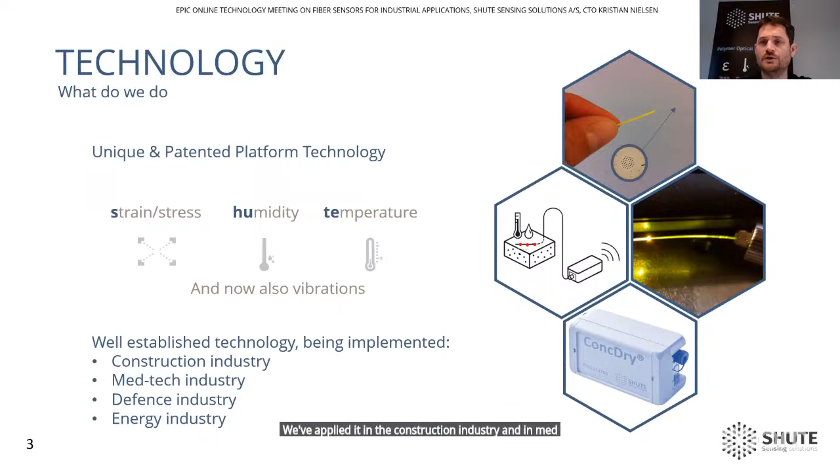And with that, we have been on a journey from taking our technology from the lab to now offering it to multiple industries. So let me talk a little bit about our technology first. So we do polymer optical fibers, and with them we can offer a sensor that is very sensitive to stress and has a very large strain range. It can measure humidity and it can measure temperature. And from those three parameters, we get our name, which is strain, humidity, and temperature. And being around for 10 years, we've also been able to demonstrate our technology in many industries. So we think of it as a fairly well-established technology. We've applied it in the construction industry, in the medtech industry, and in the energy industry. I'll get a little bit back to that in a minute.

Further on our technology, we make our fibers out of polymer, but we use the microstructured fabrication technique. And as you can see in the top left corner, there's a scanning electron image of the end facet of the fiber. We have 36 holes running through the length of the fiber in a lattice arrangement, and in the center there's a hole missing, and there where the hole is missing, that's the core of our fiber, and that's where we capture light. So using microstructure or photonic crystal technology like this enables us to make our fibers single mode. It also makes it possible to make fibers without any doping. So we can use pretty much any polymer. Our only requirement is that it's a thermoplastic, and it's fairly transparent.

We manufacture all of our fibers in-house. We use the drill and draw method, where we use a CNC machine to drill the holes in the pattern that we require, and then we have 2 draw towers to scale the fiber down from a 60 millimeter preform down to a hair thin fiber or any dimensions that we want. Well, this fabrication technique was developed at university, so there's nothing new there.

Our mission has been to take this technology from the lab and make it mature enough to go into industry. And two of the biggest barriers that we identified early on was the handling of the fibers and the cost of instruments. Now, the handling of fibers involves simple things such as putting a connector onto the fiber, putting protection and housing and adhesive methods or barriers for moisture or other handling mechanical aspects. And this, of course, is continuously going on.

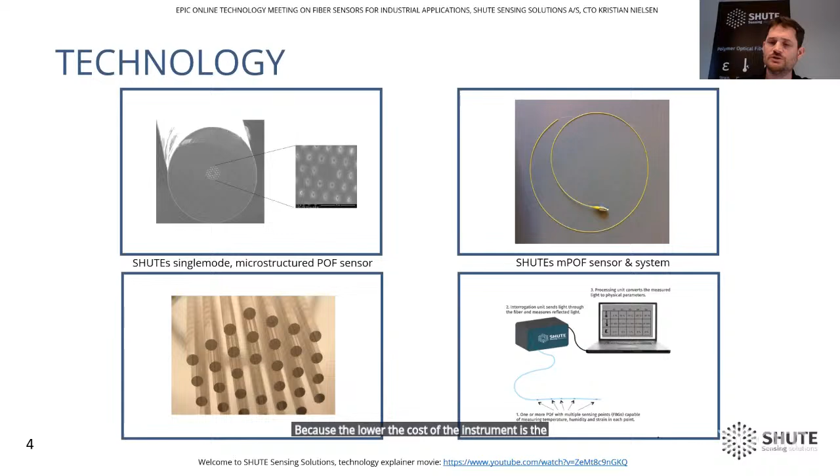Now, in order to interrogate these fiber Bragg gratings, you need a light source and a spectrometer. And part of our mission has been to lower the costs of these instruments. And our latest Contra system is now down to 2,000 euros. I think that this is a very interesting problem, and I know that there are other companies working on this as well. So I look forward to actually getting that cost down, because the lower the cost of the instrument is, the more markets we can address, the more applications we can address with our technology.

Now, the sensors themselves, being made of polymer with an FBG in them, really enable us to utilize the benefits of polymer optical fibers, in the sense that the polymer is much more soft than a glass fiber. Glass fibers are notoriously very stiff and hard to work with, and they break in a shattering method, whereas polymer fibers are much more flexible and can be more easily stretched and have a different failure mode.

The low Young's modulus of polymer fibers makes them ideal for picking up very small stress levels, and also makes them compatible with soft materials. So we have some applications where we embed our fibers into rubbers or into carbon fiber elements, plates. And in that sense, we offer new optical strain gauge capabilities to places where you maybe couldn't go with glass fibers because of their inherent strength.

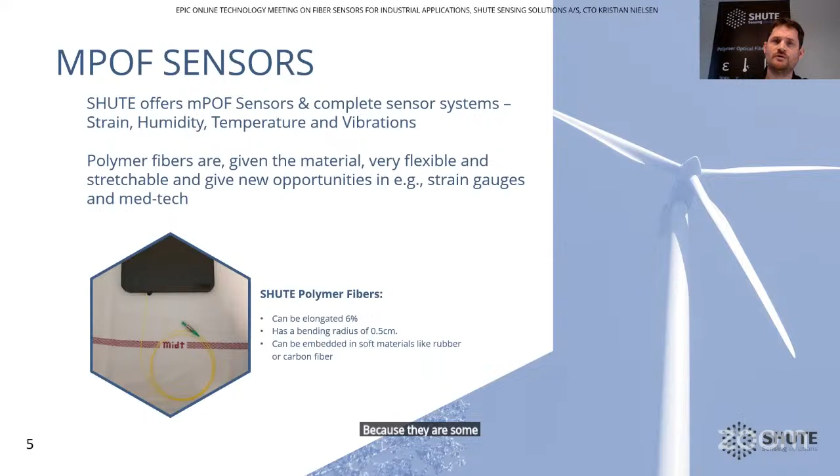On top of strain sensing, our fibers have a lot of traction as humidity sensors, which is also a fairly unique capability to polymer fibers, because some polymer fibers are inherently absorbent of humidity, and that makes them very good as humidity sensors. We have our own sensing system that we have developed called Contra, but we've also seen a pull for making optical sensors that are compatible with C-band equipment. And these kind of sensors we see as a complement to silica fibers, to glass fiber sensors, such that you could have a daisy chain of silica fibers, and at the end you could have one of our polymer fiber sensors as a humidity sensor.

The big advantage of using the polymer fibers as humidity sensors is that they are much more robust with regards to very high humidity levels. We can leave them in water for months, and afterwards they will still function after they dried off. There's no drift and there's no lock-in problems, as you might see with the electronic humidity sensors. And they are fairly compatible with many harsh environments. And being made of polymer, the sensors themselves do not corrode and they do not conduct electricity.

We have a few applications running with these kind of humidity sensors, and we have envisioned them being used in structural health monitoring, but also for critical infrastructure on pipelines or in tunnels, where you want to make sure that there's no ingress of moisture. They can, of course, be customized to different kinds of housings and different kinds of membranes that we can put onto them.

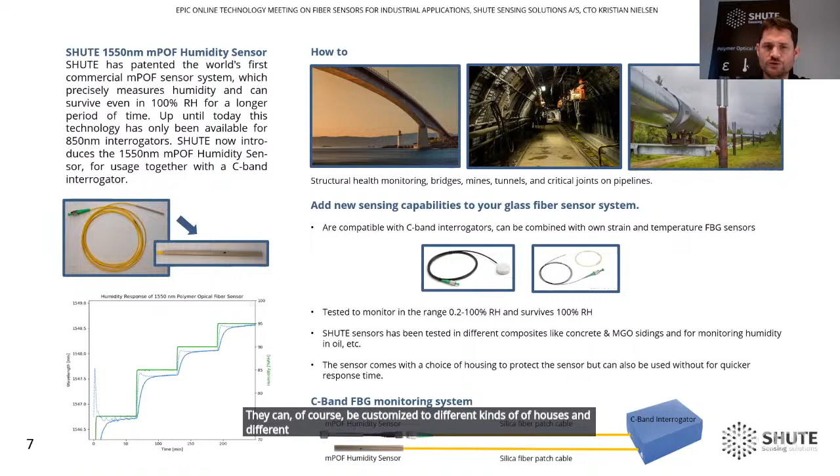The last thing that I would like to mention is that we are also offering chirped fiber Bragg gratings. These chirped fiber Bragg gratings are a fairly novel technology from our side, where we can make up to 100 millimeter long chirped FBGs. And these offer unique properties when it comes to detecting fast events, such as detonation fronts or shock waves in materials.

And again, we utilize the unique properties of polymers, being that they have a much lower mechanical mismatch as compared to glass fibers. This technology has already been demonstrated by the nuclear research facility in France, CEA, where they've done shock wave detection using our fibers, where we're basically using the polymer optical fiber and the destruction of the fiber for timing the arrival of the detonation waves.

And this kind of technology has a lot of promise, as well as maybe in other kinds of structural health monitoring, as in small solid rocket motors and stuff like that. I think with that, I will finish my small presentation.

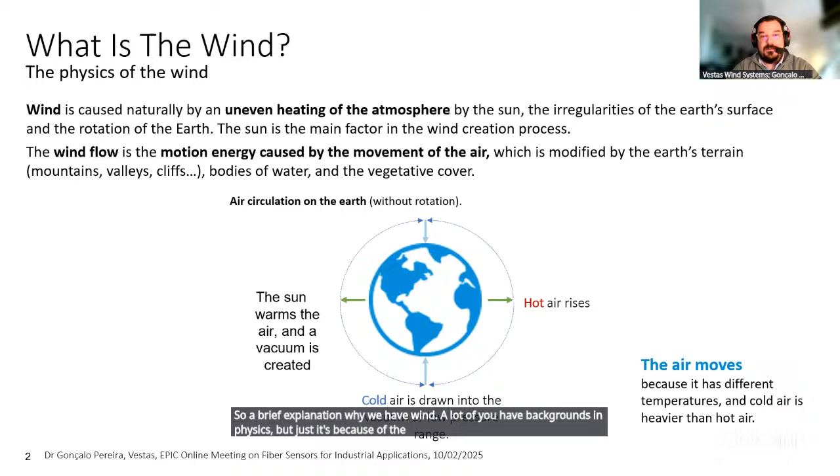A lot of you have backgrounds in physics, but it's because of the differences in temperatures, right? It's uneven heating of the surface, which generates wind. And then through the use of, in this case, 3 blades, we can convert some of that wind energy into torque, mechanical torque in this case, and then electrical torque to provide electricity to anyone that needs it.

There's something called the boundary layer. So you expect higher wind speeds at the top versus low wind speeds at the bottom. This is important not for this slide specifically, but a bit later when I show you the data that we pull out of these sensors. In general, we capture the wind using the blades, which we then convert into mechanical torque. We go through a gearbox, which increases the rotational speed, and it goes into a converter and transformer. From that, we produce electricity.

Regarding fiber optic applications, we have one related with sensing, which I'll talk about in detail today, but we have two more. So we have the FORJ. It's the fiber optic rotating joint, which connects the nacelle, so the static part, with the rotating part, the hub in this case. We have spinning blades, right? And we have communications, we have control, we have a lot of information that goes back and forth between the hub and the nacelle.

It goes through the center of the gearbox, right? So it goes through the whole converter assembly. So imagine like a drivetrain of a car. We have to fit a fiber optic through exactly the center of that. So it goes through the other hole to the hub to get that communication and that information going between the two components.

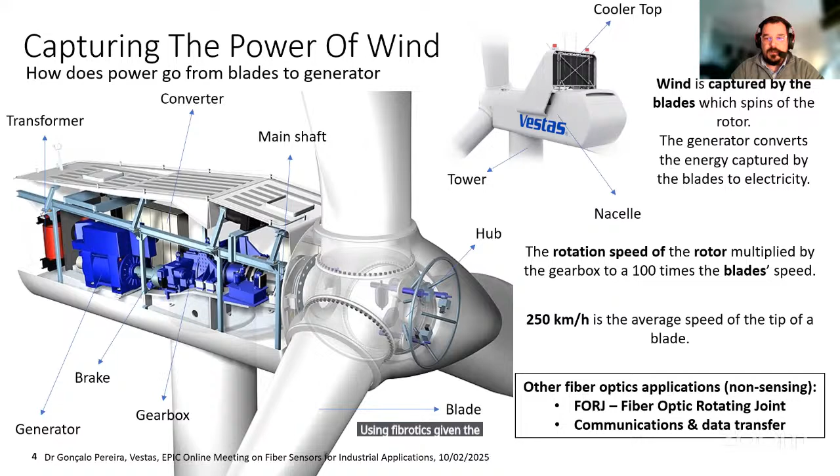Given the amount of data and speed that we request, it's basically the only option to go. So as an industry, if you're not familiar with it, it seems like there isn't a lot of technology going. It's a fairly big industrial machine, but it's no longer an option just to point the turbine at the wind and expect that it produces the best technology, right?

So I've put here a simple feedback loop to understand that sensing is a great part of why we can have modern turbines. We can control the turbine actively, not passively like in the past where we had stall control turbines where the blade itself would stall to prevent it from overspinning. Now we control the turbines using the pitch of each blade. We forecast and monitor ambient conditions. So if we can sense something, we can use predictive control to actually control ahead of time.

We can monitor energy production. And the most interesting part that people never think about is we can design innovative products and new control features. For example, one of our best known features is called rotor lift control. We basically take the example of a helicopter and flip it sideways. A helicopter would be something like this, and then we put it in a vertical position. That enables us to use the lift that we get from the blades to remove some of the natural weight, the gravity component of the nacelle, out of the tower.

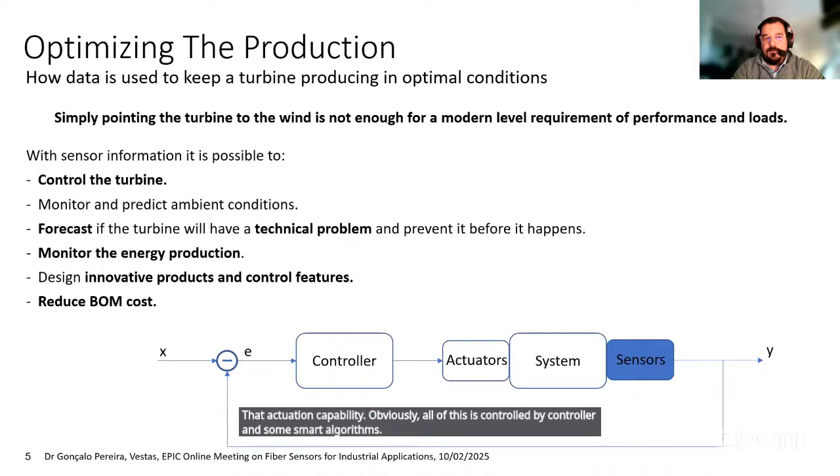So every time the turbine is in operation, we generate a lift, and that lift means that we have a lower load on the tower, which means thinner towers, less material, lower cost. And we do all of this with the aid of sensors and pitching. So we can reduce the bill of materials cost in many ways, in the blades, in the towers, in many components, because we have that sensing capability and that actuation capability. Obviously, all of this is controlled by a controller and some smart algorithms. So there's benefits not only for sensing, but also in other aspects of this.

I'll focus today on blade load sensing. It's the only one that currently uses fiber optics. And one question might be why, right? It's located on the blades. So the risk of lightning conduction is a major issue, and the main reason why we use fiber optics on the blades. We cannot have anything conductive that would basically fry the whole system of the turbine.

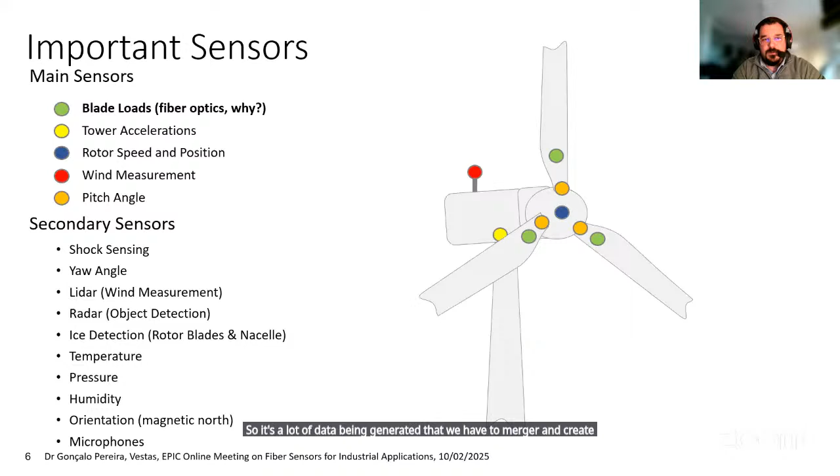So focusing a bit more on blade loads. Why do we need to measure them, right? We want to avoid as much as we can that a blade breaks or a tower collapses or we have some form of catastrophic failure. These are machines that are designed to last 20 to 30 years, so it's very expensive to get a crane there to get them replaced, right? It's not a sacrificial component. They need to last 20 years.

Furthermore, it's cutting edge in the sense that we're producing structures that are very long, very thin, very light because they're spinning, made of fiberglass or composite materials in this case. So it's really important for us to measure the health, how many cycles they do, and the overall performance of the turbine. And if we observe any degradation from what we expect, then we need to stop it and have it inspected or perform some form of repair if needed.

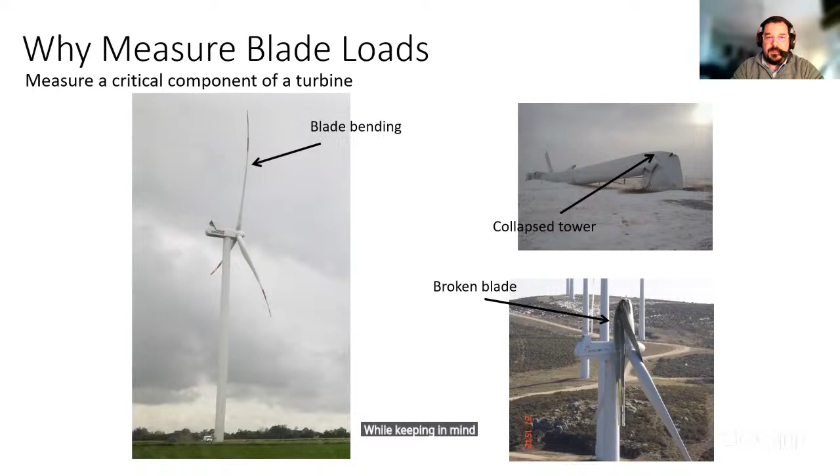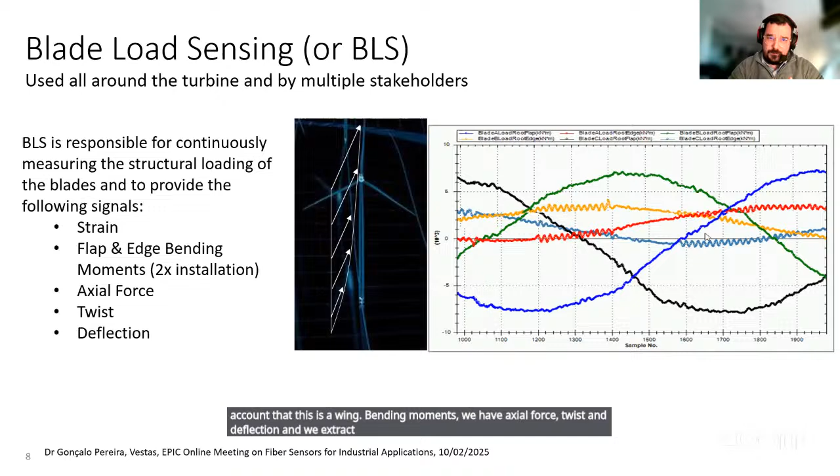And we usually are able to measure strain, flap, and edge, so taking into account that this is a wing, bending moments, we have axial force, twist, and deflection. And we extract all of this information from 2 sensors. They're exactly the same in design, but they're positioned in different places inside of the blade.

So the sensor is very simple. We have a diode that shines onto receivers, and depending on the bending moment locally at the sensor, you can see here on the bottom left that it's glued to the blade, we have more light hitting one of the receivers or the other, right? And we can calibrate this.

It's a very simple sensor that's covered by an armature to protect it from debris; there are a lot of things that might happen. Let's imagine a service technician forgets a tool. Then we have a screwdriver flying around the turbine and the sensor is protected. It was produced internally by Vestas, which was then sold to KK Wind Solutions. And we developed this system many, many years ago. And it's a very simple system.

That's why we like it, because in our industry it has to be cheap. It has to be easy to replace if there's an issue. And on the software side of things, it has to be transparent for us, right? So we need to be able to understand if there's an issue with the signal, with the information that it's providing. We don't typically accept any black boxes.

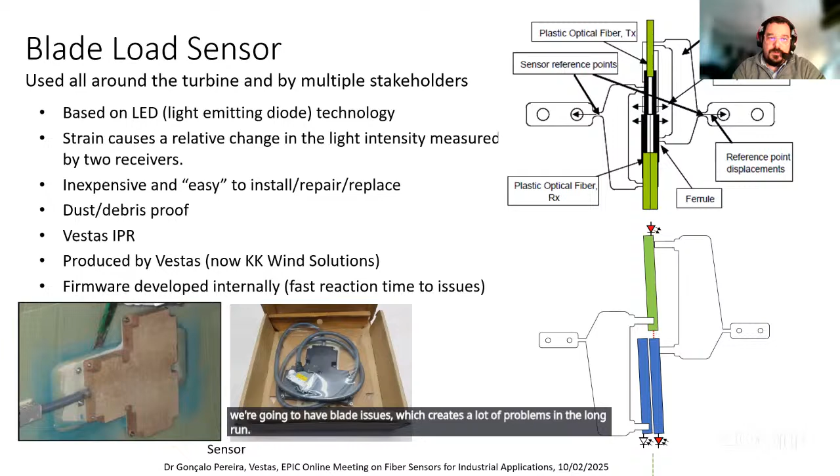So we need to be reacting really fast if there's a blade issue, because this generates a stop time on the turbine, and that generates millions. And if we're not able to detect this, then as shown by our competition in this sector, we're going to have blade issues, which creates a lot of problems in the long run, in terms of reputation and sales and all of the above.

So this is our largest turbine. I use the Portuguese stadium because we're Portuguese and where we've designed this, so you get the magnitude of this. It's the size of the stadium with the benches. It's not a football field, right? It's the football field plus all the stands there. So it's the size of a football stadium when it spins.

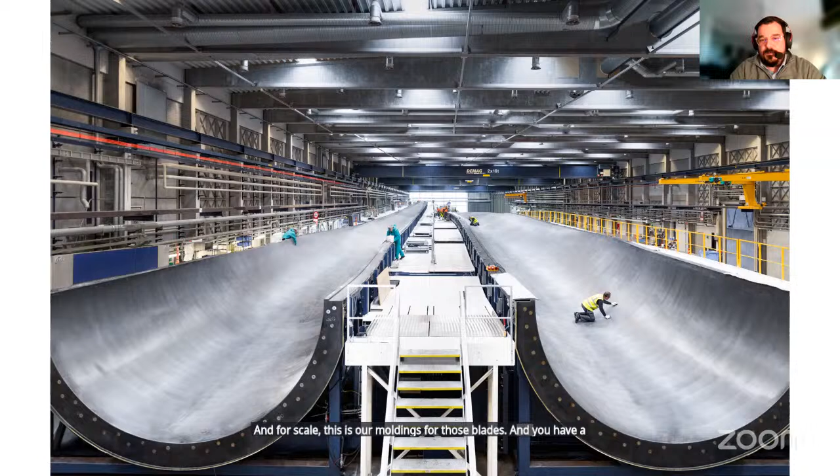And for scale, these are our moldings for those blades, and you have a couple of people for scale. Basically, where the first person to the right is placed is usually where we place one of the sensors. The other one is perpendicular to that one. So we capture the flap moment and the edge moment of the blade, both bending moments, and if we combine them, we have a way to understand with the two axes the movement of the blade.

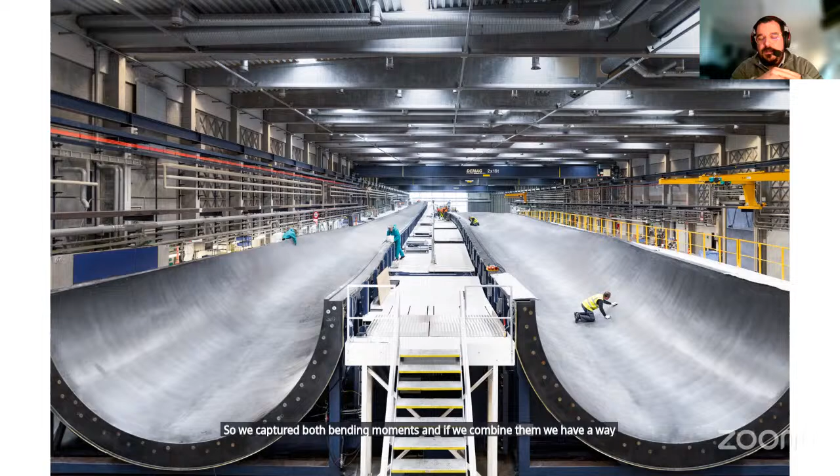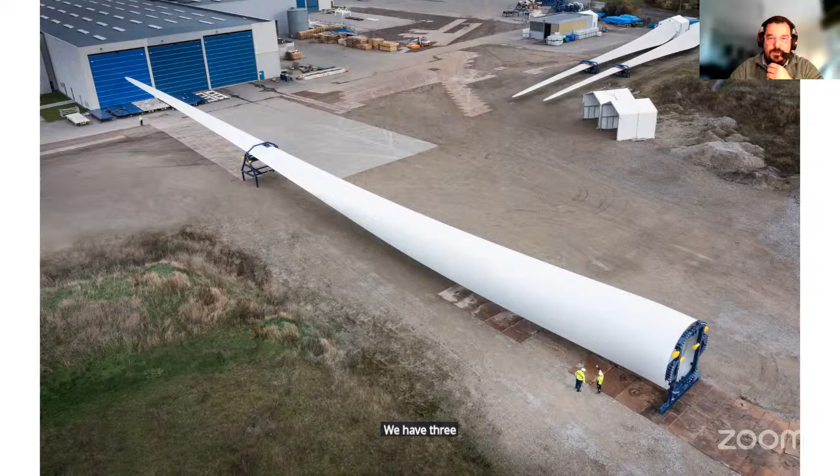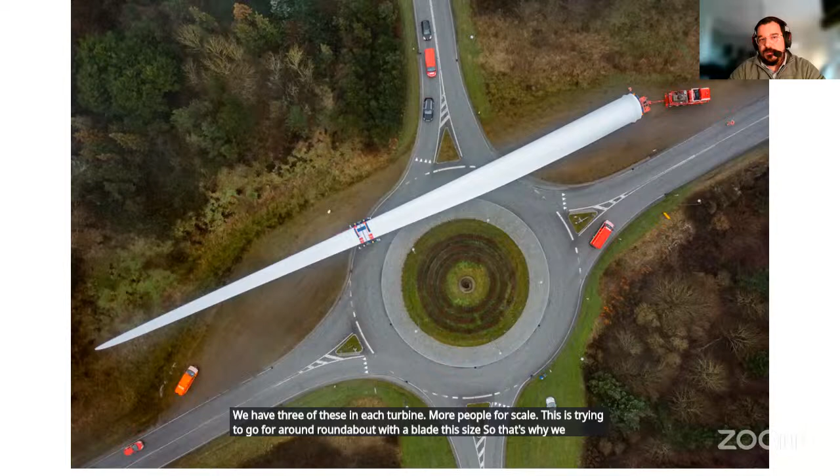They're gigantic blades, as you might imagine. These are just a few examples, and we have 3 of these in each turbine. More people for scale. This is trying to go around a roundabout with a blade this size. So that's why we try to use this offshore as much as we can. And this is a truck for scale, not a person. So you kind of see the size of this.

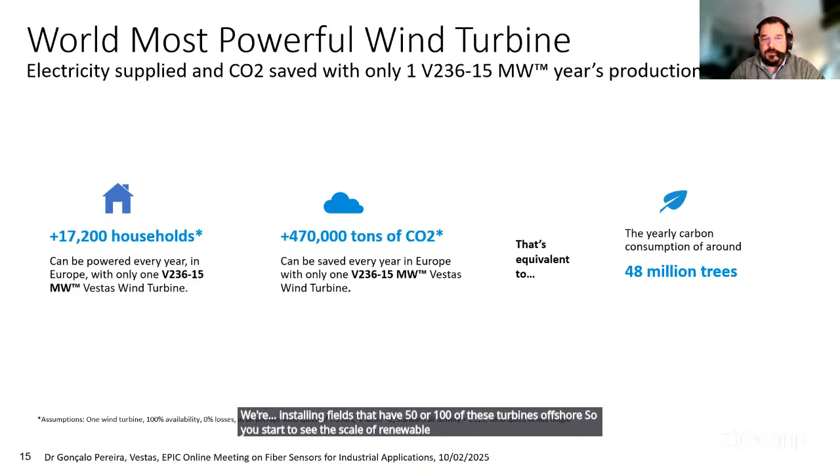With size also comes scale, right? Obviously. And it also means that one of these turbines, if it operates for a year, it can power 17,000 households. So one turbine, 17,000 households. Yeah, it's very big, but has a lot of positives on it. So we're installing fields and have 50, 100 of these turbines offshore. So you start to see the scale of renewable energy that we can pump into the grid. Yeah, that's it.

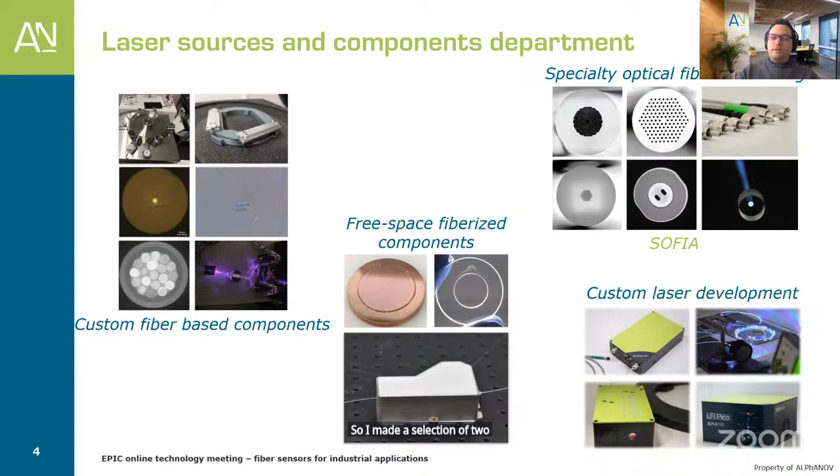So I made a selection of 2 topics I would like to highlight a little bit: our expertise in specialty optical fiber interfacing. So when we talk about specialty optical fiber, we are mainly talking about this kind of photonic crystal fiber, and we are addressing the whole zoology of this kind of fiber, meaning hollow core fiber, LMA, large mode area fiber, which are endlessly single mode. I will come back to it afterwards. Also very small core diameter fiber, which aim at making nonlinear effects in the fiber, or also amplification fiber. As you see, with all these fibers, we are capable of doing many things.

Some end capping, some adaptation between this kind of very specific fiber to standard fibers for decreasing the losses in coupling and to make it still all fiber. We have capabilities for making taperization or extremity functionalization like GRIN lens, ball lens.

And I was thinking that maybe these kind of fibers, the hollow core ones and the endlessly single mode ones, could be of interest for making some fiber-based sensors. Because a hollow core fiber is a fiber in which you are guiding the light into a core which is made of air, but this kind of fiber can be filled with any kind of species, liquid or gas, that we would like to maybe analyze. And it might be of interest for maybe inline monitoring of flow in some industrial applications.

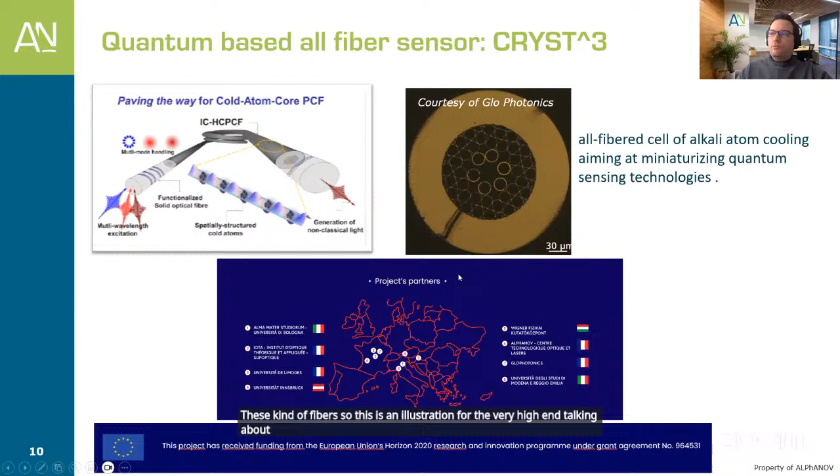And for this kind of project, we are technologically working with GLOphotonics, who is providing the hollow core fibers, and the Xlim laboratory, which is in charge of developing a way of filling these kinds of fibers with atomic vapors. So this is an illustration for the very high end, talking about quantum sensing. But I'm pretty sure that by merging all these competencies we have regarding specialty optical fiber technology and femtosecond laser inscription, we might be able to address some new kinds of fiber-based sensors.

And that's really the kind of competencies I would like to advertise today, so that if you have problems to submit to us, we could maybe think about potentialities of new components. And this is just talking about our core competencies in terms of components, but we also have capabilities to develop some lasers for making interrogators or specific interrogators. And at the scale of ALPhANOV, we also have this photonic system department, which could also support making new kinds of interrogators.

So yes, today the idea is really to demonstrate what we're capable of, so that we can really have an exchange about your problems and maybe solutions we could bring with our competencies regarding specialty optical fiber and femtosecond laser inscription.

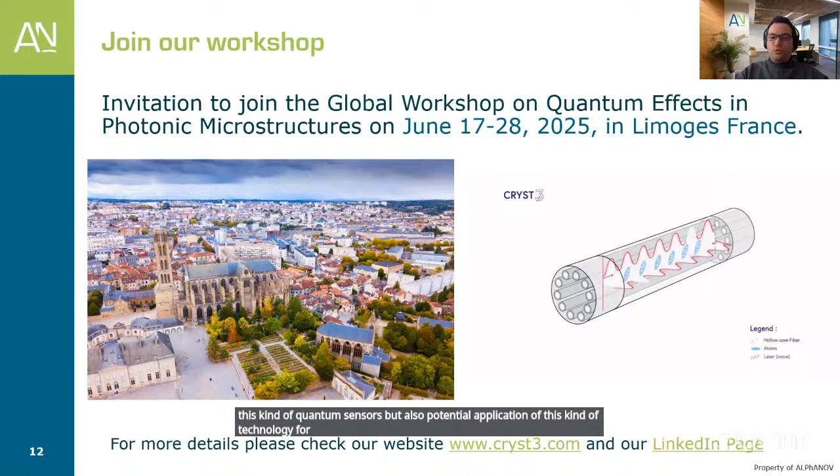Thank you, Mark. So we have time for questions or comments. I would perhaps start with a question about the platform. Thinking of the diversity of fibers, and also the different characteristics that the Bragg gratings can have, I guess the platform for inscribing the gratings needs to be flexible. Is that something you also see from this side, or do you want to go to a more fixed situation where you address some particular cases?

Now, as an RTO, our target is to have flexible platforms so that we can really try to address some very custom needs. So we do have platforms for making point-by-point or plane-by-plane inscription, meaning that we have no non-recurrent engineering like a phase mask to provide. We can really write on the fly with periodicities and modulation depths that we can adapt. And the idea is really to have an agile platform to be able to propose some agile methods for optimizing sensors or at least components.

I don't know if there is any other question or comment. Yeah, Roman. Yeah, thank you for the presentation. I have rather a technical question. I'm curious to know about the lateral resolution of your femtosecond laser inscription. As far as I understood, this is a non-linear process, so it should be better than the diffraction limit.

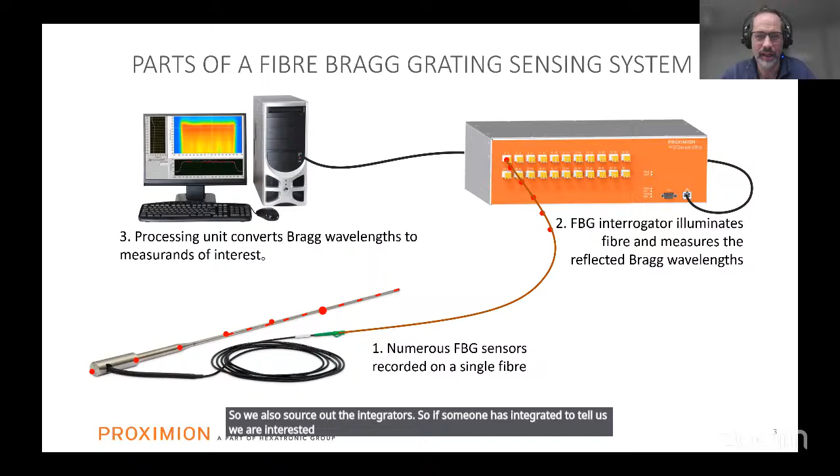And depending on the application, you could have quite different requirements on the interrogator. So we also source other interrogators. So if someone has an interrogator to sell to us, we are interested. And also tunable lasers are of interest. So one example here we spend a lot of time on is to develop sensors for airborne applications. One thing is to develop the technology. Another thing is to really get it certified for use in an aircraft.

And a common problem in most aircraft is that you have a bleed air system for supplying power for the de-icing and for air conditioning in the airplane. It's a power source that you take from the jet engines, from the compressor stage. But as you have a lot of moving joints and so on, you are a bit afraid that you should get a leak. So you typically have a bleed air overheat detection system. And now we are supplying this as a fiber optic solution. And there's plenty of this piping inside the plane, and you want to monitor it almost everywhere.

So that means you need to supply like 6,000 sensor points distributed over 70 meters. So we need to make a lot of gratings. And also important here is that we cannot supply individual calibration with each fiber cable we supply. They need to be identical in wavelength. So that's quite a challenge, but we have been able to meet that. So we manufacture and we also developed these sensor gratings. And we also helped our customer with the design of the optical part of the interrogator. So we also try to be a good supplier in that way, to also supply some knowledge.

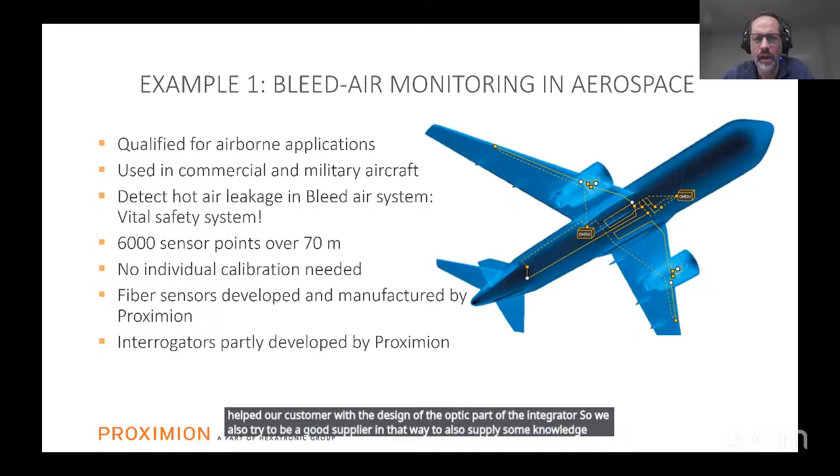A second application where we have a lot of customers is in continuous steel casting. I guess most of you don't know too much about continuous steel casting, but that's the dominant way of casting steel. And this is in huge steel plants, here in this case an example from Sweden, where you have 180 tons of liquid steel coming in, and then you allow that to flow into first the tundish and then here into the mold. You see my arrow, hopefully. And these are 4 copper plates that are cooled with a lot of water, and then you will have the steel that will... what's that?

It will solidify here, at least at the surface, with the steel coming out at a rate of 1 to 3 meters per minute, and then it goes down here. This is maybe 200 millimeters width here, and in the depth direction maybe up to 2 meters. So this is big, but a critical stage here is the solidification, because that can affect the

quality. And if you're unlucky, you can get the surface of the steel stuck here, and then you can get a breakout where you have steel flowing all over here, and that ends up quite expensive, because it's tricky to remove solidified steel from all these rollers and equipment. So it's important to keep track of the temperature in these copper plates.

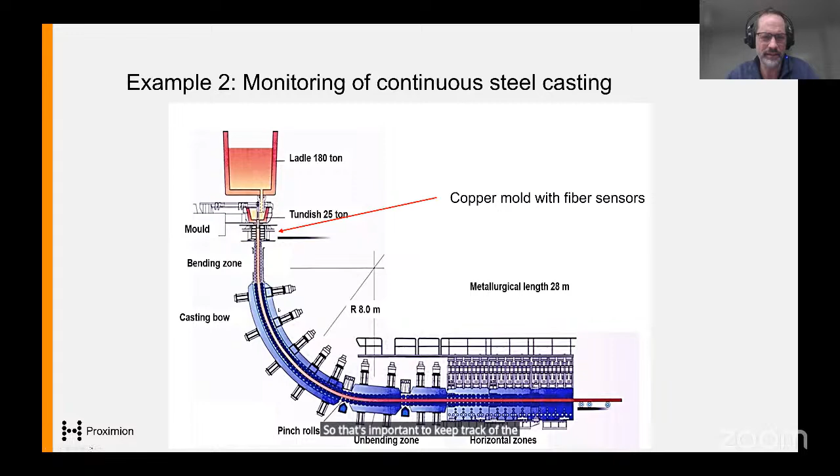That is usually done with thermocouples, but you can have only a very limited number of thermocouples, maybe 16 on the mold plate. But we instead have fibers that are vertical, mounted into drilled holes in the copper plate, and each fiber could have maybe 50 to 75 individual sensor points. And you have this on all the plates in most cases.

We did the first installation in 2014, so this is quite mature now. In that case, we have 2,660 sensors, so you get a thermal map on the display. And of course, practically, these cables should withstand a tough environment, and we also need a very reliable interrogator that should work for a long time without any problems.

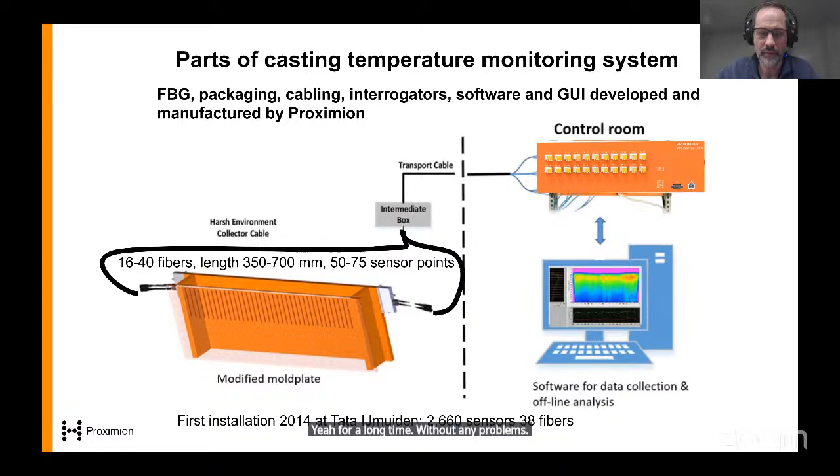And you think steel is one thing, but there are so many different steel grades, and some are very difficult to cast. So there's a very big interest, because if you can improve the quality just a little in the casting, the most critical stage, that's really worth a lot for the plant. In this case, it was Tata Steel in the Netherlands.

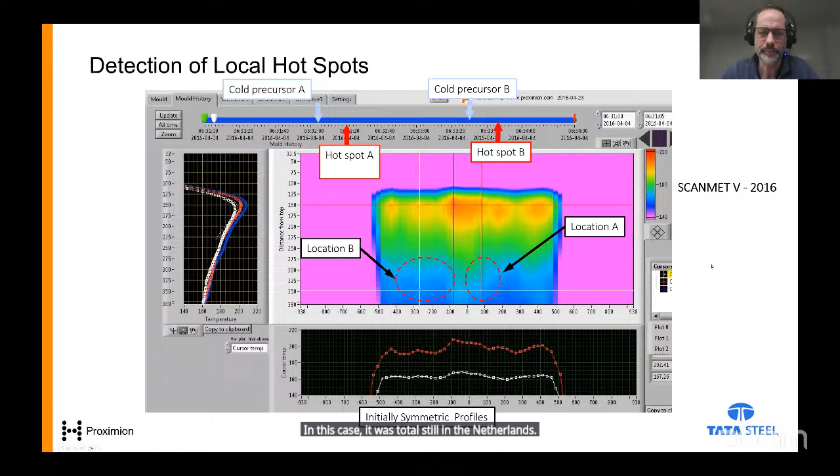You can see this temperature variation, and if you change the casting speed, you can also see how that affects the solidification by monitoring temperature. Very important is the mold powder you put on top as a lubricant during casting, and its effect on the temperature. A common problem is cracks on the surface, which are quite expensive to remove. Even worse, with hot rolling they can end up as defects on the final product.

In many cases you use an electromagnetic brake or electromagnetic stirrer, and they will affect an electric sensor. So it's good that you can monitor the system while the brake and stirrer are on. That was not possible with a thermocouple. There's still a lot of work going on on how to use this data in the best way, but there's a lot of interest because suddenly they can see what's happening inside the mold.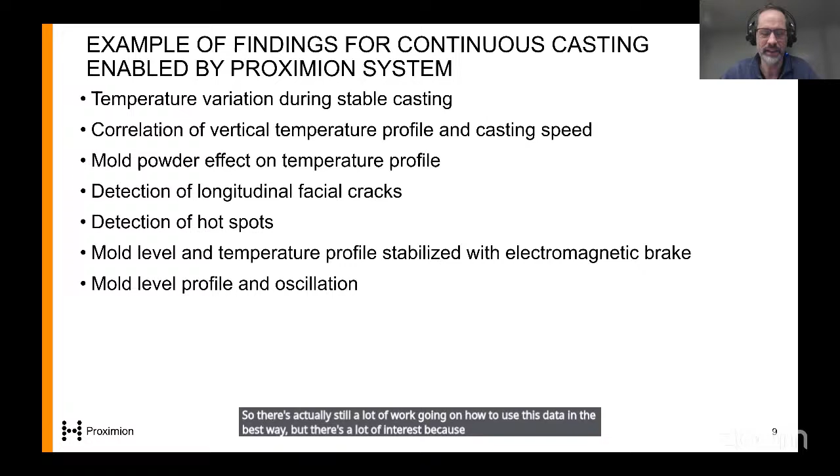So in general, with the fiber gratings, you can do more optimization, and we also add safety because you can detect these breakouts. And in the end, you want to reduce cost and energy use, because you don't have to remelt when it really goes bad. And it turns out that this is really robust and reliable, which is very important in the industry.

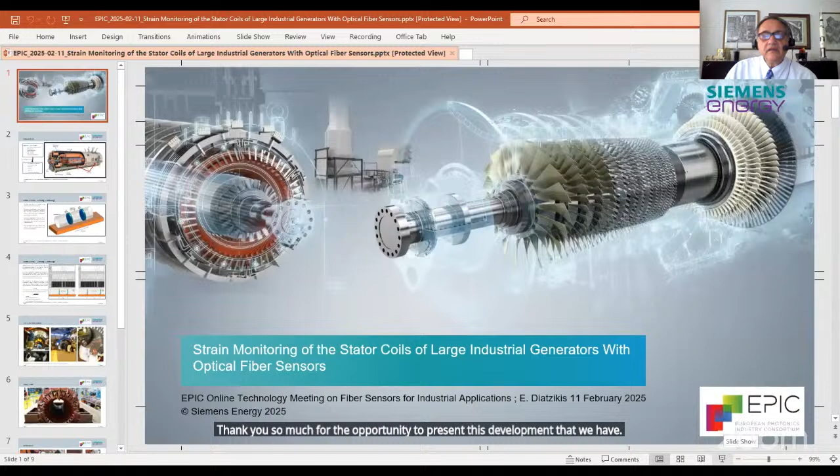Thank you so much for the opportunity to present this development that we have conducted at Siemens. I've heard a lot of fiber Bragg grating talks here today. I just want to show you on our typical turbo generator some of the locations where we put fiber optic sensors, and most of these locations have been utilizing fiber Bragg gratings. But today I'm going to talk about a different sensing technique that does not use fiber Bragg gratings. It uses white light interferometry.

The choice for fiber optics within our turbo generators I think is probably the best choice. And the reason for that is you need an all-dielectric material because of the extremely high electromagnetic fields that are generated inside the generator, the high voltages and the high currents, etc.

And so using fiber optic sensors in our generators for Siemens Energy, at least, has been since the mid-1980s. And we've progressed and used different technologies that have been developed within optical fiber sensors. And so the issue that we really have in the industry is that it has been extremely slow to adopt optical fiber sensors, although we've utilized these sensors for a number of decades. And yet the industry is still very slow in adopting these as a viable commercial product.

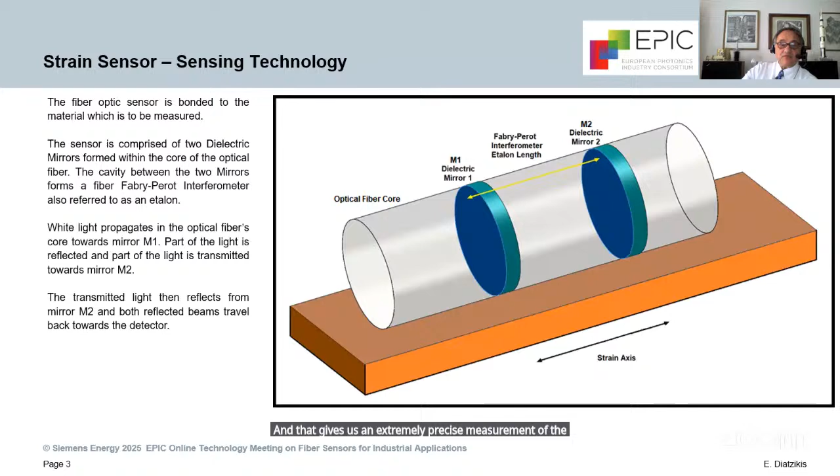And so the light from mirror number 1 and the light from mirror number 2 recombine at the detector, and it forms an interferogram, an interference pattern. And so that is the basic construction of the sensor. And so by reading the number of fringes, so to speak, we can accurately measure the amount of stretching that the Fabry-Perot etalon has undergone. And that gives us an extremely precise measurement of the strain of the substrate that the sensor is bonded to. So, here we go.

I'm assuming that everybody can see the presentation. Let me just first ask, everybody can see the left and the right side of this image that I have here?

So yeah, thank you. So as I mentioned, as the substrate experiences stretching, the two reflective mirrors also experience the same stretching, and so the interferogram moves in position, and by counting the number of fringes, we essentially have a direct measurement of the amount of stretching. And of course, from the simple definition of strain, we get the amount of strain that the substrate has encountered.

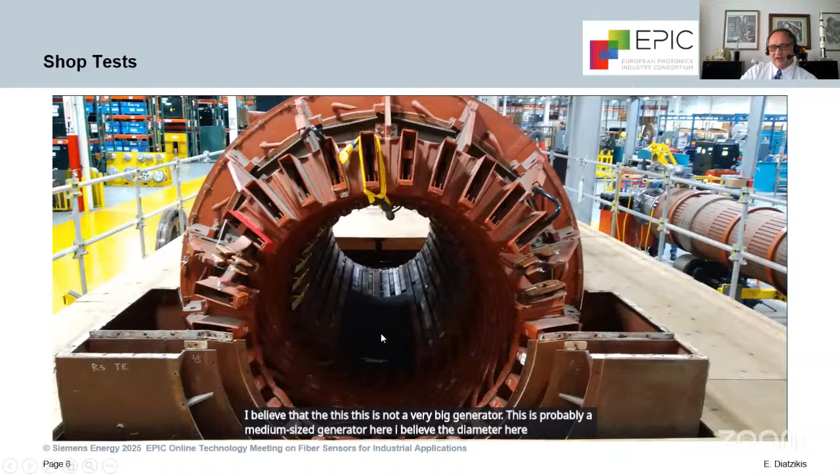What's really important in deploying any type of sensor in any field is, yes, we want the sensor to last a very long time during the operation. But a very key critical aspect is the installation of the sensor. And in our industry, our installers are used to these very large machines that have a lot of weight associated to them. So to be gentle with the optical fiber sensors, as most of us have experienced when we first use these type of sensors, it's not practical. So the sensor needs to be robust not only in its workability during its lifetime, but also during installation.

And here you can see how the installation for the shop test went about. You can see we use hammers and very stout gentlemen that are not afraid to do whatever they need to do to get the job done and finish as quickly as possible. So this is something that we keep in mind for any type of sensor that we install, particularly fiber optic sensors.

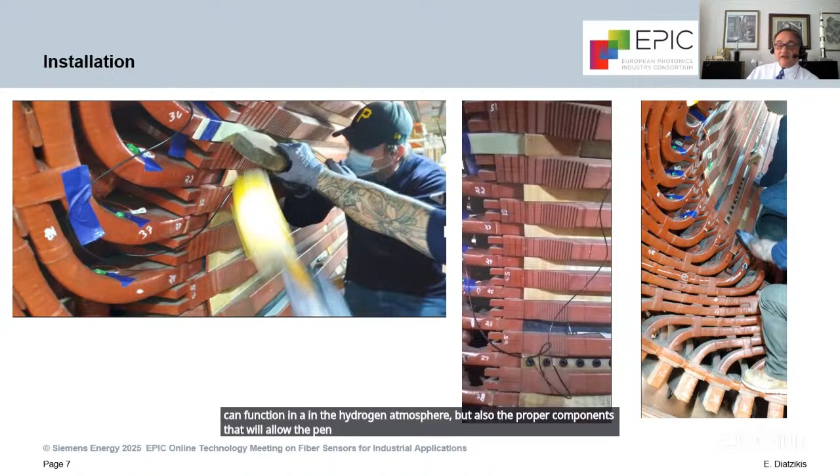And so let me just briefly talk about the benefits of this particular technology and fiber optics in our generators. So stator winding tightness tests are typically conducted every 4 to 6 years, as I had mentioned. With monitoring, these tests can be considered on an as-needed basis. So if we know the condition of the machine, we call this condition-based maintenance.

If we know that an outage needs to be scheduled, material can be ordered prior to the outage and have everything ready on site so we can minimize the amount of time it takes to bring the machine down and then bring the machine back up to operation. Of course, we can postpone the normal test that we would do according to the time schedule, and perform these tests as needed.

Of course, fiber optics, being all-dielectric components, are extremely important, especially for measuring these measurands inside the generator, because they're impervious to electromagnetic interference. For this particular sensor technology, it is an absolute strain measurement, and it is not affected by temperature as your typical fiber Bragg gratings are. Of course, we know the Bragg condition is twice the effective index and the pitch of the grating. So by measuring the difference in the pitch of the grating, we have a change in the Bragg condition, in the Bragg wavelength.

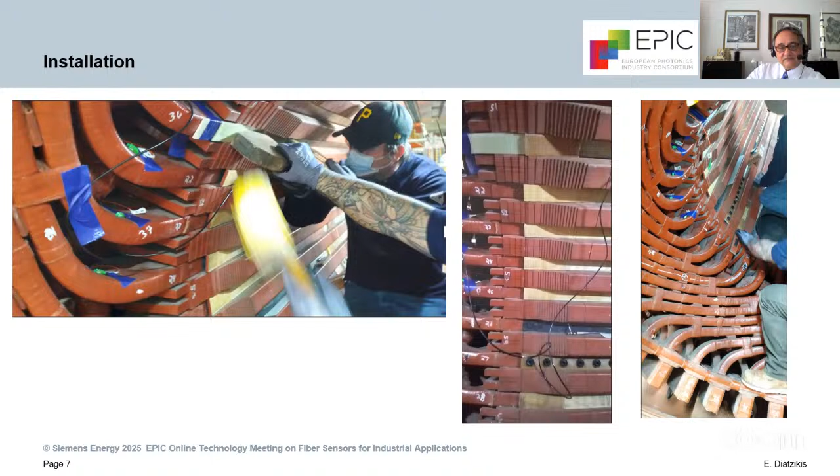I have perhaps one first question about the fiber, because we heard in the previous talks also about the use of specialty optical fibers. Is there something special in this sensor, or perhaps you are considering using specialty optical fibers in the future for any reason? Two points in answering that question. I am constantly looking for different ways to make measurements, not only within our generators, but also in our gas turbines or any of the other machines that we use within our industry.

So although my background is in fiber Bragg gratings, my first love, it does not hinder me from assessing and looking at other technologies. To the second point of your question, the optical fiber that we use for this particular technology, there's nothing special about it at all. It has to be multimode fiber because we're pumping white light through the optical path.

Okay, very good. Sahum. So actually, my question was about distributed fiber sensing, but since you are using multimode fiber, probably a distributed optical fiber sensing system is not suitable. It is not possible with this type of technology to have multiple sensors on one optical fiber. But distributed sensing fiber can localize your temperature and strain at any position of interest, like Brillouin based or Rayleigh based.

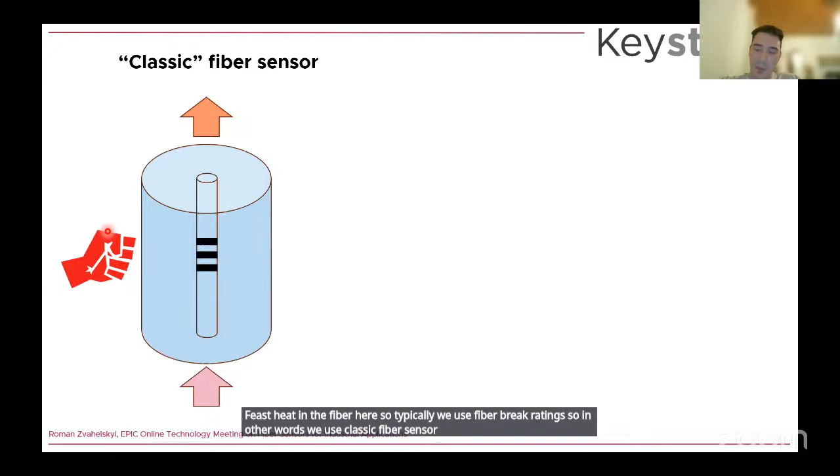Perfect. Thank you. I would like to start with the definition of the classic fiber sensor. Here we detect reflection or transmission shift due to changes in temperature or strain, represented by a fist hitting a fiber here. Typically we use fiber Bragg gratings, so we use the fiber intrinsically as a sensing device. But here at Keystone Photonics, we produce fiber probes. Instead of using the fiber itself, we use the end of the fiber, the fiber tips.

We use the additive technology of 3D laser printing. We also use femtosecond lasers, but instead of inscription, such as Alphanov does, we do additive manufacturing of polymer lenses. We do not really attach fiber lenses, but we fabricate in situ. We detect the cores of fibers and fabricate polymer micro-optics in situ and use them as sensing devices.

This is a more illustrative example of the Keystone approach. Here you can see two typical structures printed by Keystone Photonics. This is a cross section of a fiber array, and the first structure represents a freeform structure, a globe, and the second fiber was used for printing a periscope lens that focuses light into this globe. We can produce any kind of freeform optics. We now focus on refractive optics, producing different micro lenses with reproducible beam shapes and beam expanders.

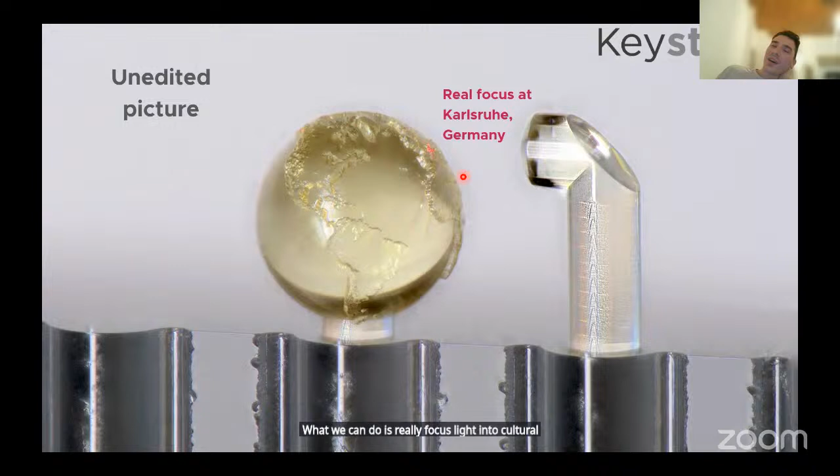And this is not really a marketing image. We can really focus light into Karlsruhe, Germany, where Keystone Photonics is situated. We are a fast growing startup, with around 10 people.

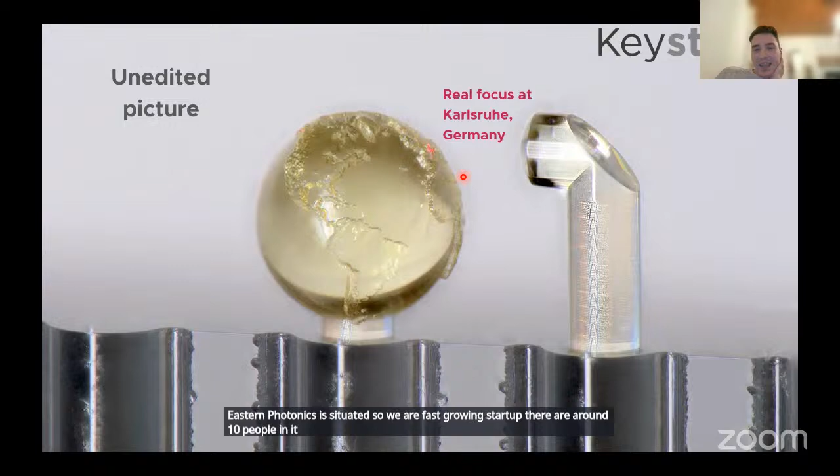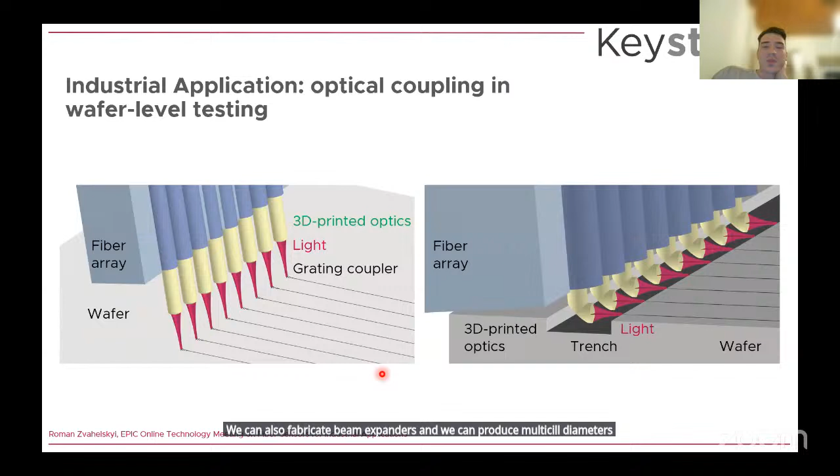Speaking about industrial applications, we provide innovative solutions for optical coupling, and our base market is wafer level testing. Here you can see two typical products. We fabricate lenses on fiber arrays for both grating coupler solutions and for trench coupling, where we can deflect light by 90 degrees or by any arbitrary angle. We can also fabricate beam expanders, and we can produce mode field diameters from 2 microns up to 15 microns.

And as you can see, using just normal technology, you are prone to variation in coupling efficiency, and our printed lenses have much better coupling efficiency and are less prone to variation. And this is for the grating coupling approach.

For edge coupling, our solution is basically the only one, because the only possible alternative to edge coupling is using a 45-degree polished fiber array. And here you need to move the fiber array as close as possible to your edge, to the waveguide, and using our approach, we can achieve up to 1 decibel of coupling efficiency, and using the standard approach, you will achieve something like 4 dB, with very large variation.

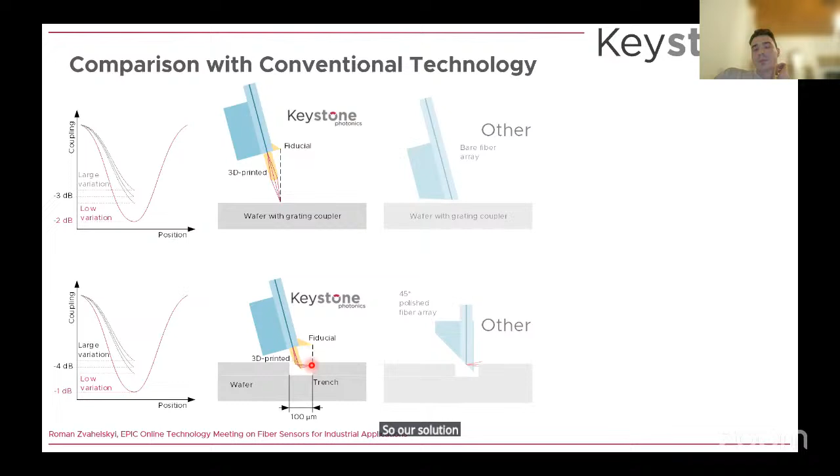And if you want to improve coupling efficiency using the standard approach, you basically crash the fiber array into the trench. So our solution provides a very efficient method of optical coupling using trenches and edge coupling. So we are currently dominating the market for lensed fibers. We are collaborating with many major players in the wafer level testing area. So we provide our lensed fibers to FormFactor, to ficonTEC, to MPI testers, and to many other photonic companies

in the photonic industry. But since this meeting is about fiber sensors, I'd like to introduce also a real optical distance sensor. So this is our latest development. Actually, the idea of this distance sensor was born when we faced the challenge in wafer level testing first. So here you need to understand the distance between the fiber and your chip. And basically what people typically use in this area is an extra capacitive sensor or additional distance sensing device, which is very difficult to align. It costs money and, yeah, it's simply ineffective.

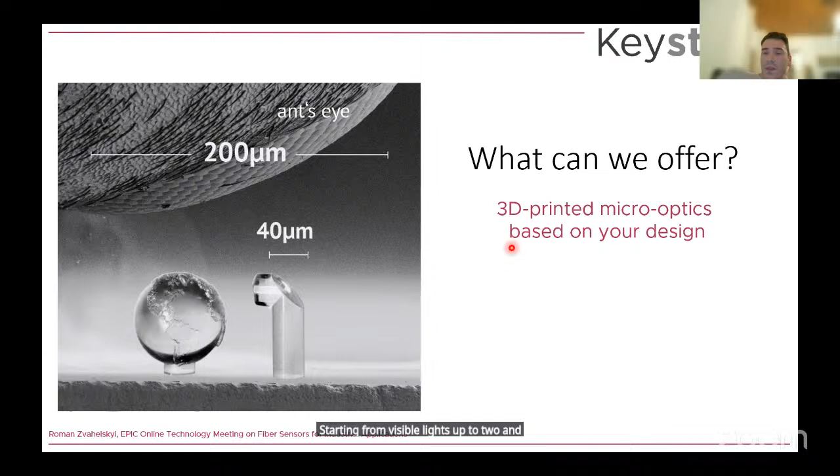So what we can offer is 3D printed micro-optics based on your design. We provide solutions for fiber arrays up to 64 channels. We also work with different wavelengths, starting from visible light up to 2-plus microns of wavelength. We directly print them on fiber arrays, and we do not really want to limit ourselves to wafer level testing, we are currently looking for new applications. So for example, we can also print lenses on fiber Bragg gratings and use them for some kind of spectroscopy. Or we can also study viruses and so on.

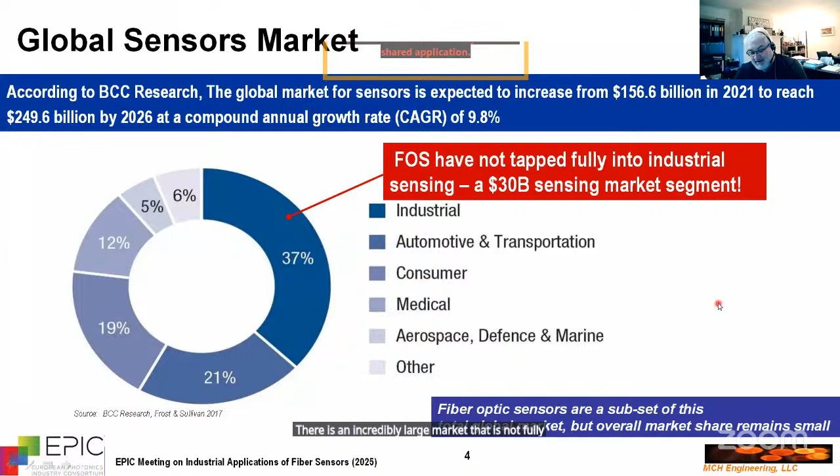So, present commercial status. If you look at the global market for sensors in general, different marketing agencies like BCC will tell you that by 2026, it's roughly 250 billion, with a B, dollars a year. And obviously, this is segmented across different industries and application segments. But as you can see in the pie chart, by far the largest one, intuitively, is industrial sensing with roughly 37%. So there is at least $30 billion annually of expenditures related to industrial sensing. And sadly, fiber optic sensors don't make a significant dent in these $30 billion. So there is an incredibly large market that is not fully tapped, and this is a nice opportunity for fiber optic sensors and photonic sensors in general to exploit that market.

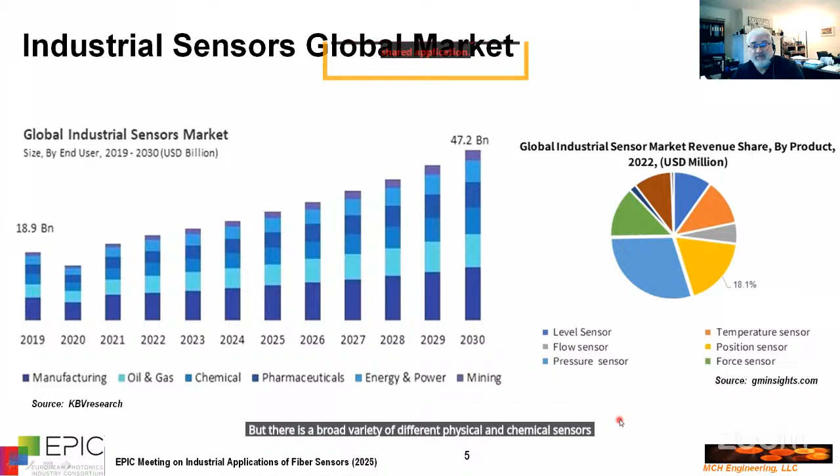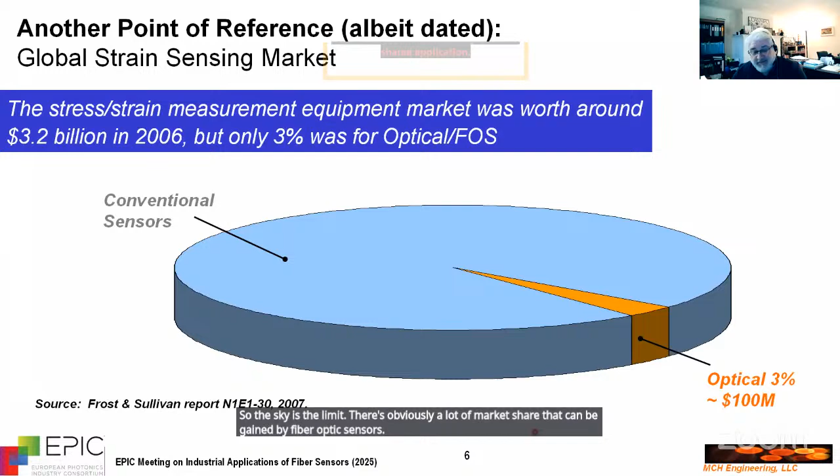And again, just to draw the contrast of how poor the penetration of fiber optic sensors is in industrial sensing, we can look at the breakdown of strain gauge sensing technology. This report is dated, it's from 2007 by Frost and Sullivan. At that time, they were estimating that the global market for strain sensing equipment was on the order of $3 billion. And out of that, only 3%, or 100 million, was being supported by optical and fiber optic sensing solutions. So the sky is the limit. There's obviously a lot of market share that can be gained by fiber optic sensors. It's just a matter of having the right solutions at the right price point and with the right features. And fiber optics has demonstrated that this is very achievable.

And fiber optic sensors have had significant milestones and success stories across different application fields, whether it's fiber optic gyros, high current sensing in the electric utility industry. And one of the case studies that has been more significant, more popular over the last 20 years has been the strong adoption of fiber optic sensing in the oil and gas industry.

So this market peaked around 2014. At the time, there was a global business of $400 million among specialty fibers, specialty cables, downhole sensors, distributed sensing, connectors, etc. And this got to be very pervasive across the oil industry. Thousands of permanent downhole installations, hundreds of thousands of DTS, and more recently, DAS surveys. So if we were able to do it for a really harsh, really challenging industry like oil and gas, certainly we can do the same for a variety of opportunities in the industrial sector.

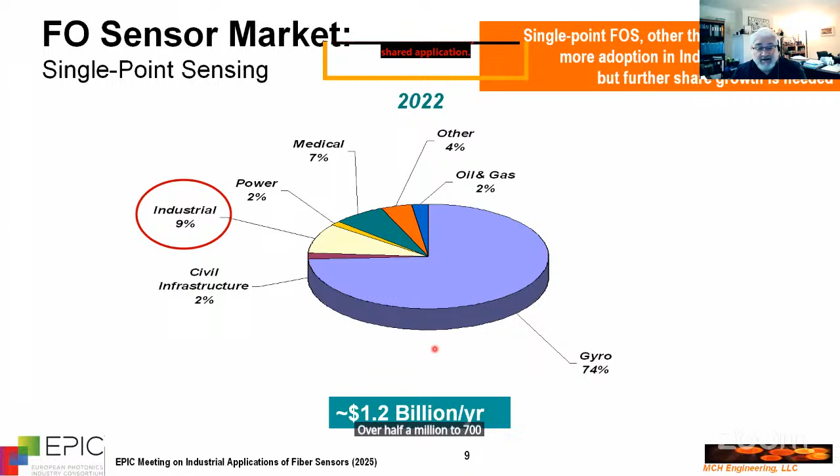But if we really look at the true segmentation and the true commercial reality, as you can see here for the case of single point type sensors, whether they are FBG, Fabry-Perot, or any other type of fiber sensing technology, about 9-10% of the total global market is for industrial applications. So there's still a lot of room to grow. Most of the single point market is dominated by fiber optic gyros. It's a $500 to $700 million a year market globally, gyros, and everything else is fairly segmented.

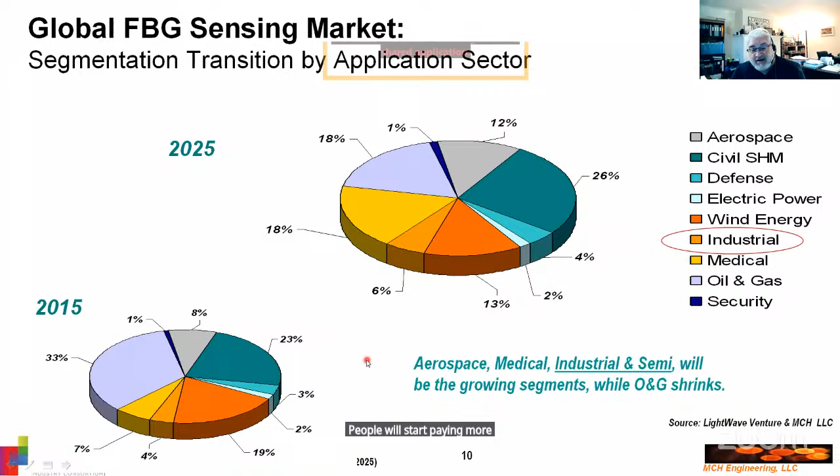But you can see here that the trends are changing, whereas in 2015, oil and gas and some other applications like civil structure monitoring were dominant. Nowadays, some of those markets are shrinking. Technologies have already been developed and adopted, and there is an interest to grow both the biomedical sector as well as the industrial one. So we see here there is some growth, but I expect that as the other applications come and go, people will start paying more attention to industrial applications and develop new solutions.

The same can be said of the distributed sensing side of the industry. DTS, DAS, DSS solutions for a variety of applications. Again, historically, this has been dominated by the oil and gas sector, some defense, security, monitoring applications. Sadly, the industrial side remains very, very small compared to the rest of the solutions.

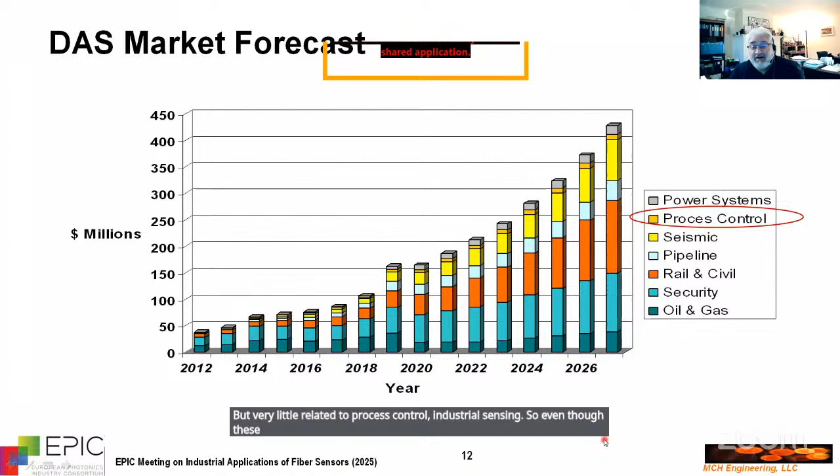The same is true for the more recent and hot market of distributed acoustic sensing, DAS. You see that some of the preferred applications revolved around transportation, security, seismic, mining, monitoring, carbon sequestration, but very little related to process control, industrial sensing. So even though these segments are relatively small, it also intrinsically implies that there is a lot of room for growth, a lot of room for opportunity.

And in a way, there's been a unique and really outstanding success story of fiber optic sensors in the industrial segment. And this one is a Canadian company called Photon Control. Whether by design or by accident, they ended up identifying the killer application, the killer app. And that basically revolves around doing temperature sensing of the support chucks for plasma etchers in semiconductor wafer manufacturing equipment. Their technology is based on phosphorescent temperature sensor probes with very simple PLC type readout detectors.

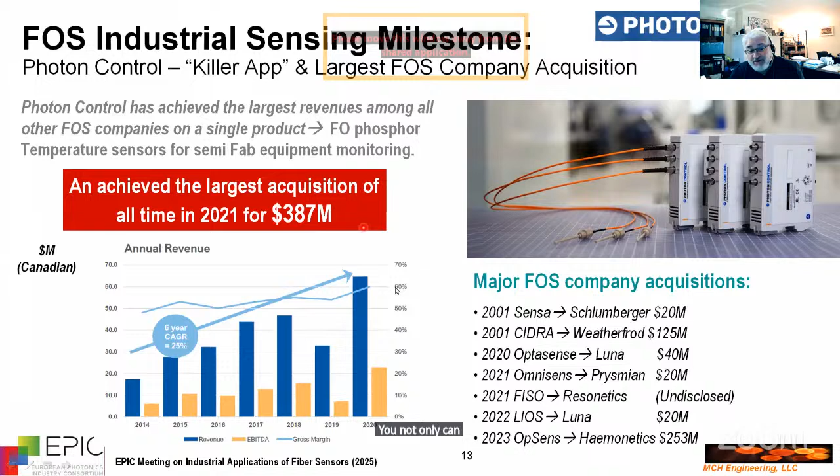This company was acquired back in 2021. It has been the single largest acquisition of any fiber optic sensing company at $387 million. And prior to their acquisition, they had revenues on the order of $60 million a year Canadian. Over here, you can see historically some of the most significant acquisitions of companies in the fiber optic sensing space, and not even the acquisition of OpSens in 2023 at $250 million comes close to the 387. So if you identify the right application where fiber optics makes the most perfect sense, you not only can make a lot of money, but you could be the target of a nice acquisition.

So why industrial sensing? Well, the reality is that if you look at any manufacturing plant, if you look at the fabrication of any specific product, whether it's in a heavy industry, food industry, pharmaceutical, textiles, materials, etc., you have an incredible amount of sensing and monitoring to do to perform control, to ensure safety of processes and personnel, to carry out predictive maintenance of the equipment, the infrastructure, also to have a more energy efficient production and reduce your costs, and certainly for quality control.

So sensors by themselves are very pervasive across the industrial segment, and there is a need for a broad variety of different sensors, from temperature to pressure to strain, load, position, gas, humidity, presence, you name it. And this is such a large commercial opportunity that obviously there is a large pre-existing ecosystem of suppliers, vendors, developers, system integrators, and you'll obviously recognize a lot of the names here.

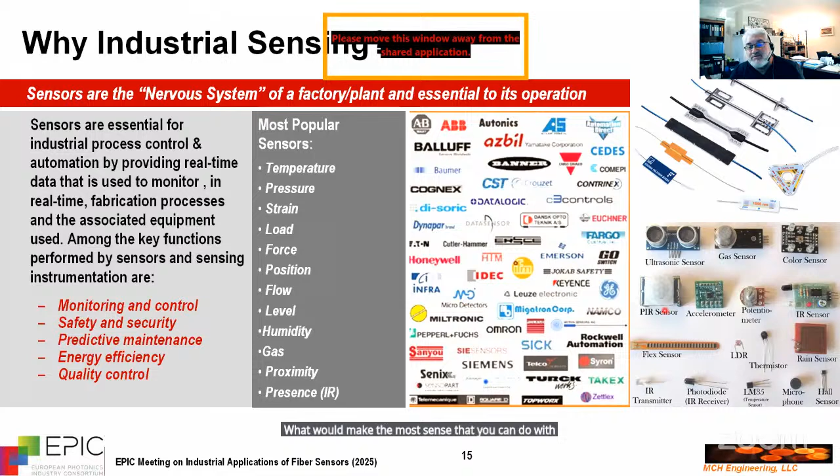So the trick here is to identify for your given company, your given process, your given technology, what would make the most sense that you can do with your own solutions based on fiber optics versus the specific needs and technical requirements of that industry.

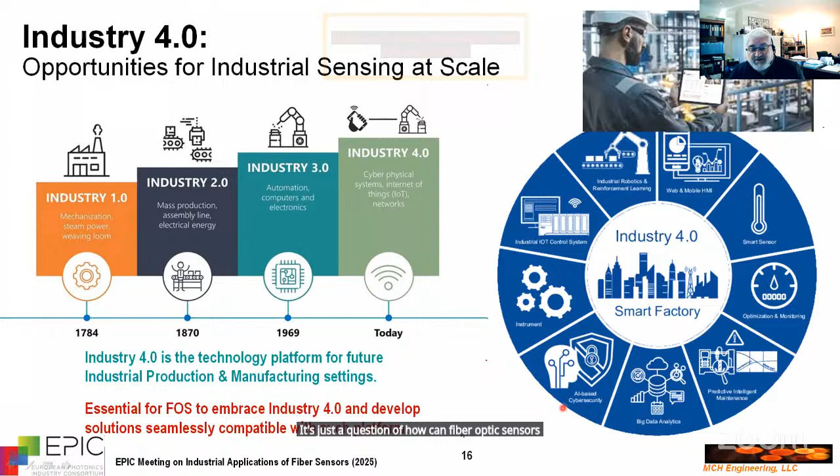The other key trend here to recognize is that more and more we are seeing the convergence of the so-called Industry 4.0, which is a blend of sensing, monitoring, control with artificial intelligence tools, with a lot of data analytics, with robotics, smart automation. And obviously, a key ingredient in all of this, the eyes, ears, fingers of any process are sensors. So one way or the other, sensors will be required. It's just a question of how fiber optic sensors can play within the envisioned environments of an Industry 4.0.

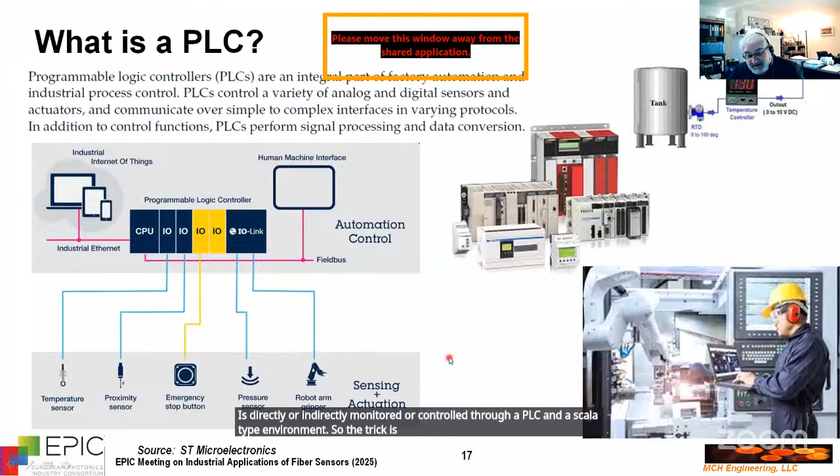And the answer is very simple. When you visit a factory, if you know about process control or automation control, sensing in an industrial setting, you'll quickly realize that everything revolves around PLCs, programmable logic controllers. So a lot of the ovens, valves, switchers, anything and everything that is done in an industrial setting is directly or indirectly monitored and controlled through a PLC and a SCADA type environment. So the trick is to make our fiber optic instrumentation seamless with this type of system.

Another similar example is the MESSKO FBG hotspot temperature monitoring system for power transformers. This is technology developed by HBK in Portugal. And here you see the three key building blocks. Again, it's a PLC-based system interrogating FBG temperature sensors, but all the data is processed and seamlessly transferred to the rest of the electric utility SCADA system through this instrumentation.

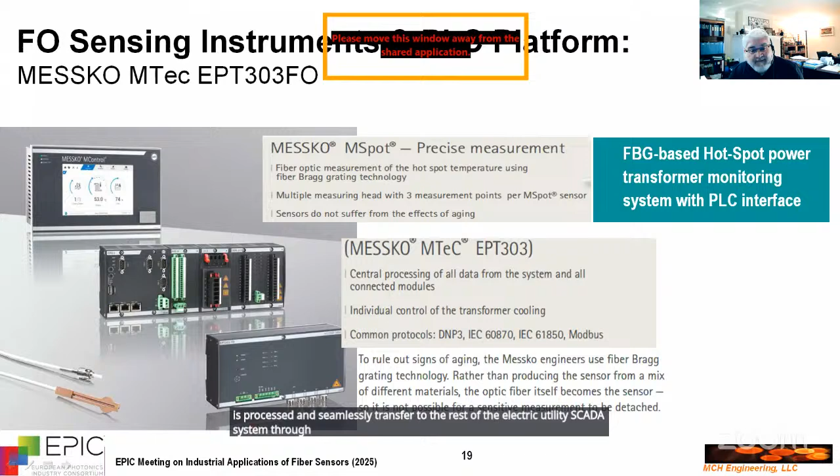Now, what are the actual applications, the actual opportunities for industrial sensing for fiber optic sensors? I have identified several areas. This is by far not complete, but these are some of the areas that are easier to reach, the most popular, the most common. So on one hand, again, process control: you need sensors for temperature, pressure, level, flow, force, strain, torque, you name it. So for any type of conventional sensor, for harsh environment applications, for multi-point sensing opportunities, you can try to develop your own fiber optic equivalents.

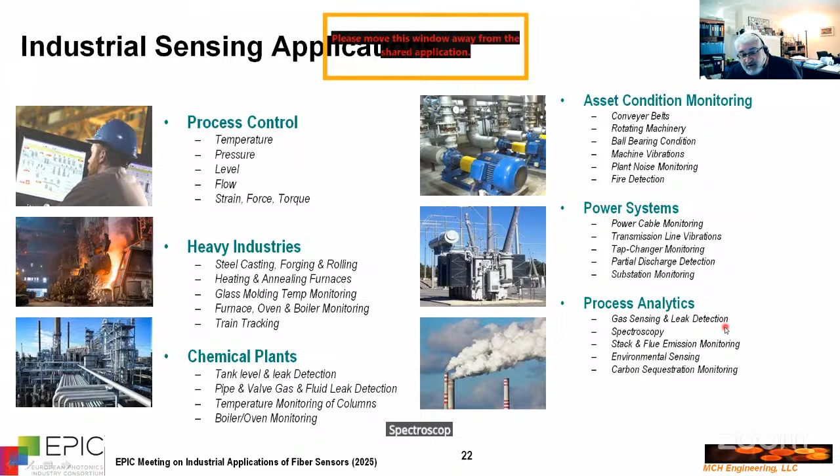And then finally, another area that indirectly can be very nicely supported by fiber sensors is spectroscopy, gas, liquid sensing, environmental monitoring, monitoring of emissions from factory flue stacks, etc.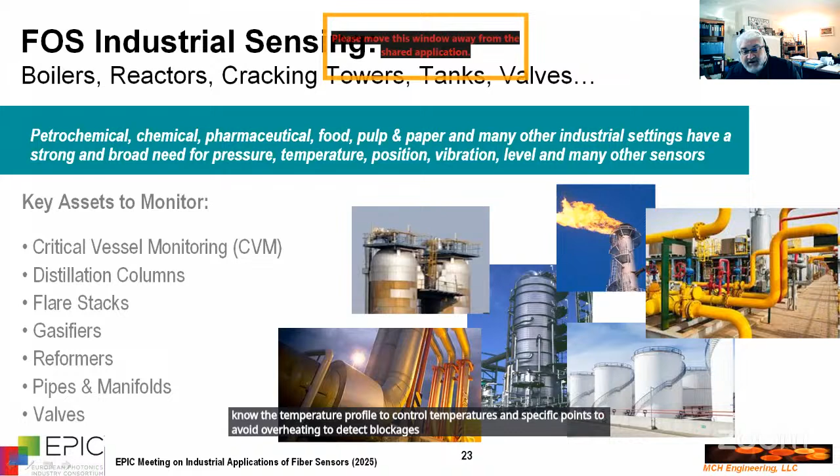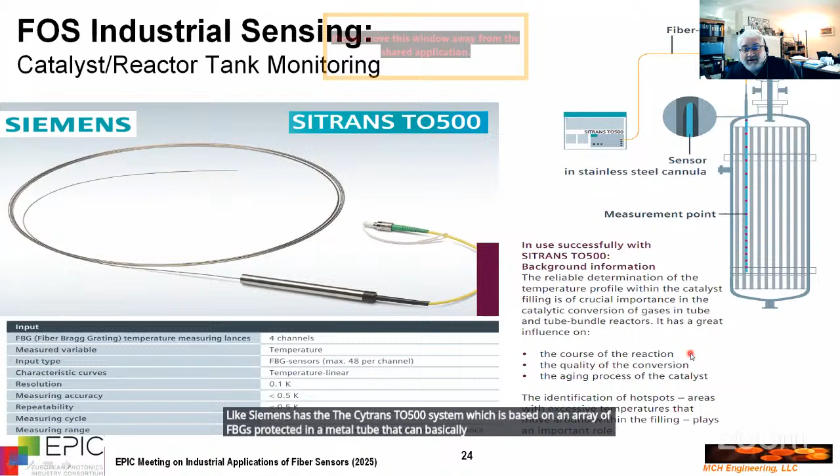So in some of the heavy industries, in the petrochemical industries, there are a lot of distillation and cracking columns. It becomes necessary to know the temperature profile, to control temperatures at specific points, to avoid overheating, to detect blockages, to avoid potential fires. Some solutions are already commercially available for some of these applications, like Siemens has the SITRANS TO500 system, which is based on an array of FBGs protected in a metal tube that can basically be installed along these boilers, tanks, manifolds.

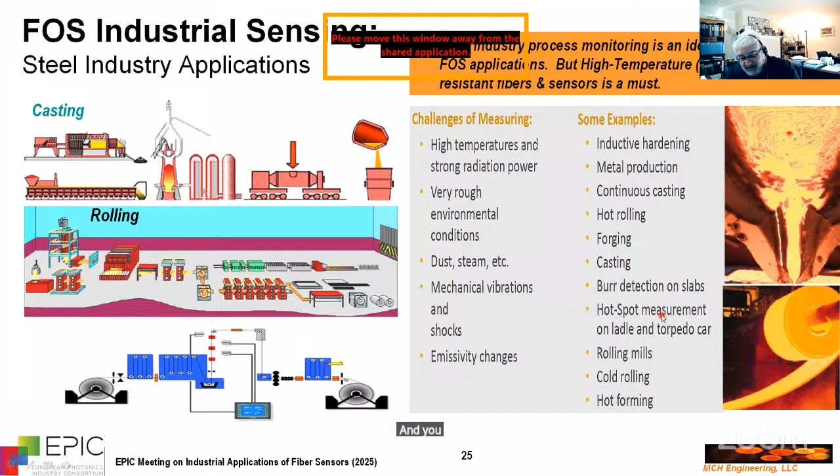Earlier, Proximion talked about their solution for the heavy industry, the steel industry, where you can have different types of steel processing, whether it's casting, rolling, forging. And there, obviously, there is a need to properly control the temperature across the process to ensure the proper annealing, the proper solidifying of the materials so that the metallurgy of the final composition is correct, and you get the right quality type of cast metal.

One area that, again, I think is completely unexploited at the moment is that of condition monitoring, particularly through acoustic sensing. This is very typical, very common, used in piezoelectric and other acoustic sensing devices. And the idea is that you can, over time, monitor any moving, rotating, vibrating piece of equipment by listening to their specific acoustic signatures and how they change over time.

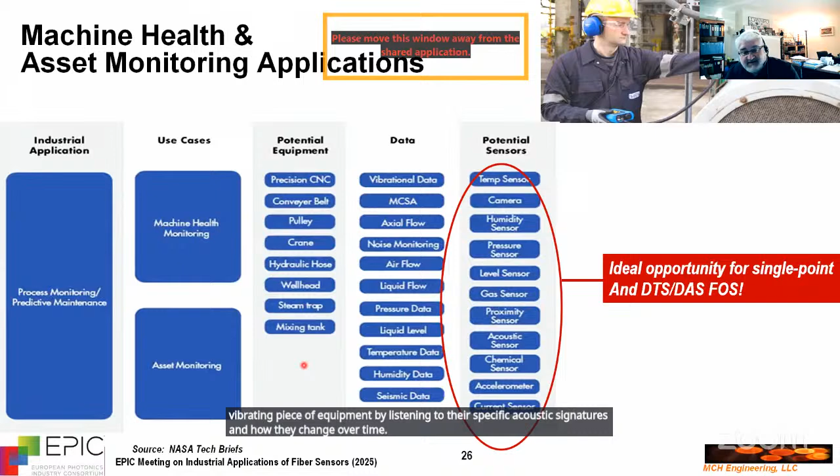And that's a way to determine how close a specific component, a specific piece of equipment, is to needing maintenance or to a potential failure, or even to causing a catastrophic accident, catching on fire, exploding, breaking other pieces of hardware.

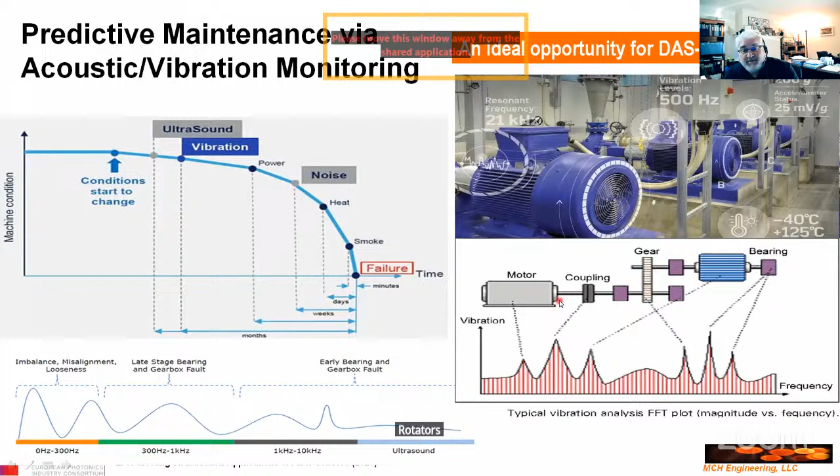So as you can see here in the graph, depending on the type of piece of equipment, it typically may be rotating, it may be vibrating, and producing a certain acoustic emission spectrum. And if you have the right acoustic sensing fibers, fiber-based microphones, or even a distributed acoustic sensing system based on coherent Rayleigh, you can continuously and over time monitor a variety of pieces of equipment like large power electric motors and determine whether any of the ball bearings, couplings, rotors, stators are displaying any particular problems and basically do predictive maintenance.

This has been demonstrated experimentally using, again, fiber optic distributed acoustic sensing, with control experiments where you have rollers from conveyor belts, comparing the acoustic emissions from a new one with a heavily damaged one.

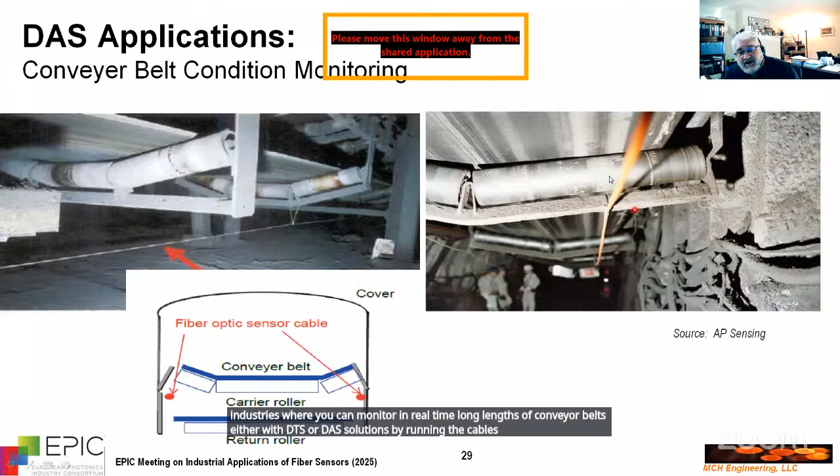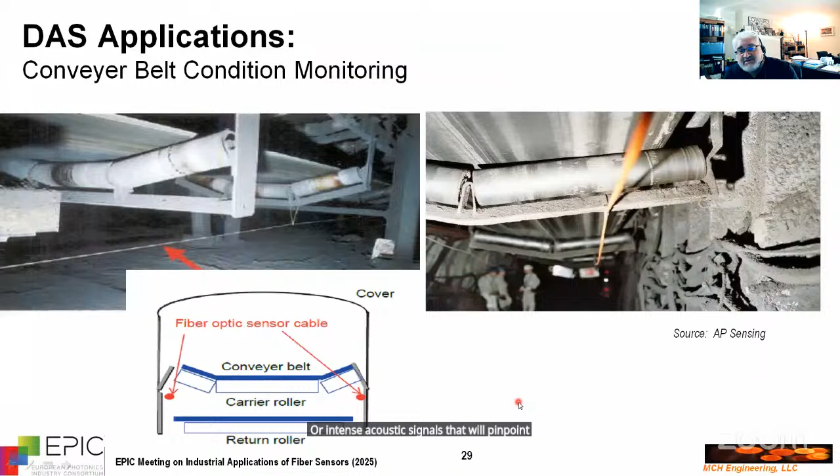Same is true for real installations in the mining industry and other heavy industries, where you can monitor in real time long lengths of conveyor belts, either with DTS or DAS solutions, by running the cables underneath the support structures and looking for areas of overheat or intense acoustic signals that will pinpoint which specific rollers are not rolling, are getting stuck, or need replacing.

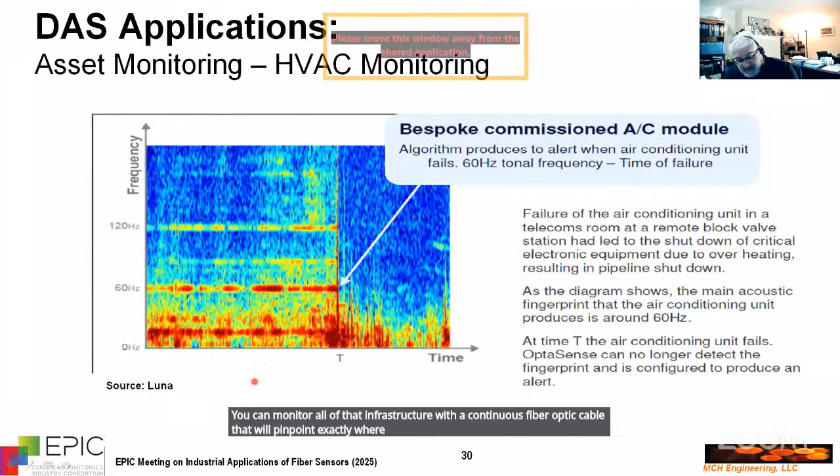Other unique applications of acoustic sensing, for instance, could be applied to air conditioning systems in large factories or even commercial buildings. So if you have problems with the compressor, if you have problems with the cooling fans, etc., you can monitor all of that infrastructure with a continuous fiber optic cable that will pinpoint exactly where there may be some problems, and the maintenance engineers can go and fix that. So

lots of opportunities here. Certainly what the industry demands, not only for industrial applications, but all sensing applications in general, is both sensors and instrumentation that are relatively low cost. Distributed sensing has become very pervasive across the industry with DTS, distributed strain sensing, as well as distributed acoustic sensing. But now for some of the industrial applications, more and more there will be a need for distributed pressure sensing, DPS instrumentation, as well as distributed chemical sensing to detect hydrogen, hydrogen sulfide, other pollutants, and methane for long length distribution pipelines.

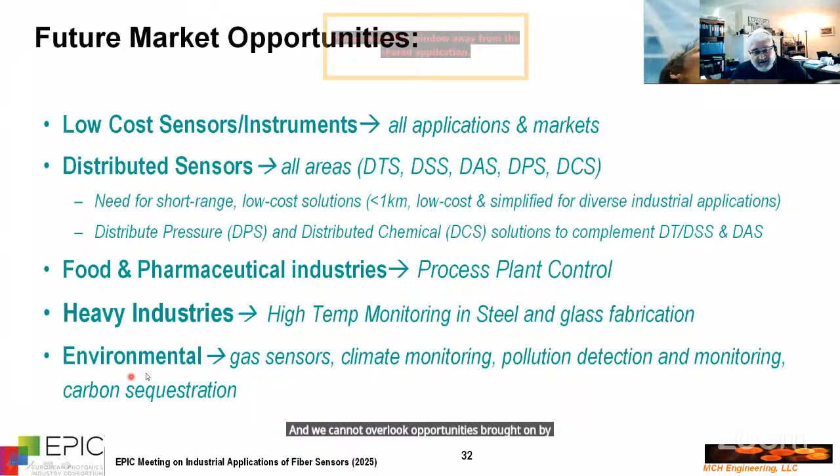I think historically the fiber optic sensing industry has overlooked the food and the pharmaceutical industries. Lots of opportunities there for sensing, for process plant control. And certainly several companies have already made inroads into heavy industries, but there is a lot more to be done, lots of opportunities there. And we cannot overlook opportunities brought on by green technologies, environmental sensing, pollution detection, etc., mostly centered around gas sensing solutions.

One key thing not to overlook for industrial applications is that oftentimes these involve harsh environments. There's lots of dust, water, high temperatures. So the fibers, the cables, the specific sensors need to be high temperature resistant. They need to use the right protective coatings, whether they are metal coated fibers, ceramic coatings, protective sheaths, and certainly the connectors, the rest of the packaging of the instrumentation needs to be rugged to survive long term in these environments.

And as I mentioned earlier, one way or the other, whatever is done in an industrial setting will need to be a part of the rest of the SCADA system of that plant, the supervisory control and data acquisition system. So we need to figure out how to extract data from our fiber optic instrumentation and make it seamless into these SCADA systems. And that also involves making things simple to run, plug and play, as opposed to needing a PhD in optics or electronics to figure out how to calibrate the sensors, how to enter data into the software provided by the vendor, and get everything up and running.

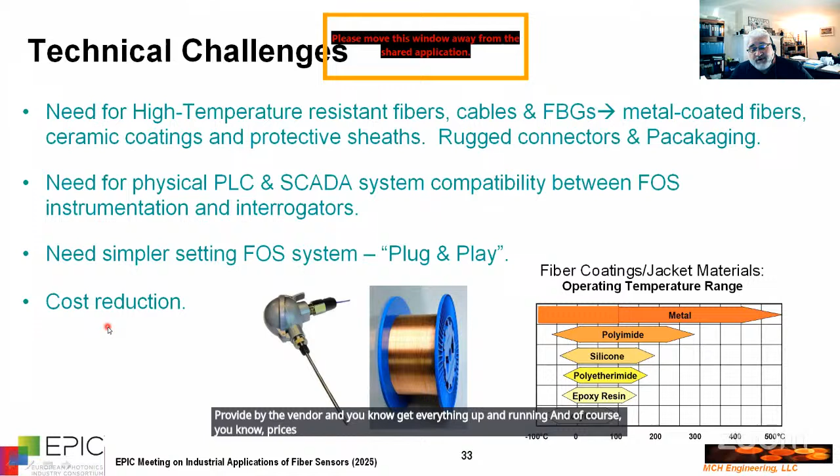And of course, prices remain relatively high compared to conventional technology. So there's got to be a cost reduction effort here. So in summary, there is at least $30 billion a year in industrial sensing, and this is expected to grow to 50 billion by 2030. So large market opportunity. It's, in my personal opinion, very untapped by fiber optic sensors. So the sky's the limit to what we could do for industrial sensing.

And fiber optic sensors themselves lend themselves very nicely for opportunities in this sector by their unique features for multi-point sensing, multi-parameter sensing, distributed sensing, their intrinsic safety and immunity to electromagnetic radio frequencies. So these are the key characteristics that would beat the conventional electronic sensors. However, again, we need to make the devices rugged, seamless with the SCADA systems, and certainly the cost. Some sensors can be a factor of 2 to 5 times more expensive than a conventional electronic version.